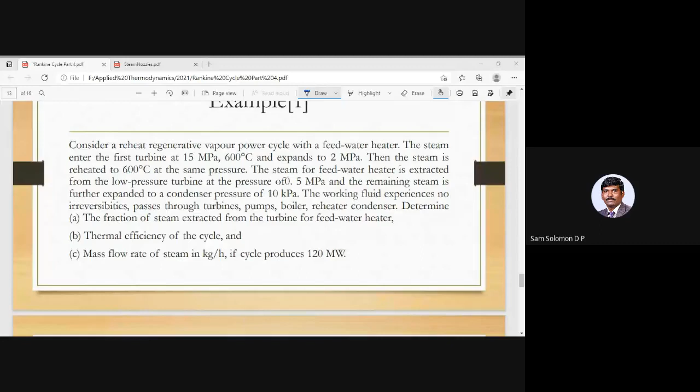So we will continue with our discussion on Rankine cycle. We will solve one problem, and with that we will close this Rankine cycle.

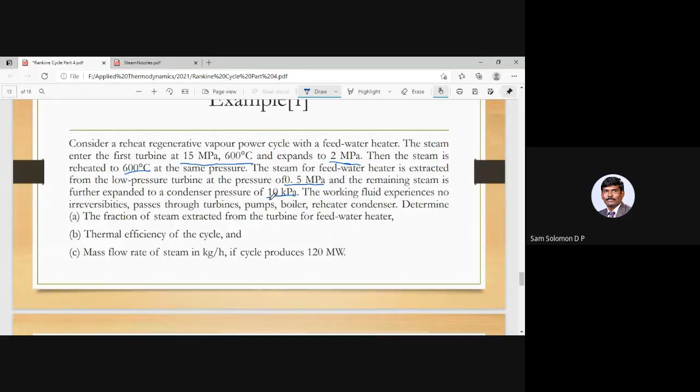The steam for feed water heater is extracted from the low pressure turbine at 0.5 megapascal. So it expands from 2 megapascal, and before it completes its expansion, at 0.5 megapascal some extraction is taking place, and the remaining steam is expanded to 10 kilopascal. So it is like 20 bar to 0.1 bar. Okay, so that is the total expansion in the low pressure turbine.

So the working fluid experiences no irreversibilities, passes through turbines, pumps, boiler, reheater, condenser. Determine the fraction of steam extracted from the turbine, thermal efficiency of the cycle, mass flow rate of the steam if the cycle produces 120 megawatt. Before solving this problem, I want you to draw the TS diagram for this. This includes reheating and regeneration, which means you will have two turbines and two pumps.

So I'll give you 2 or 3 minutes time. I want every one of you to draw the TS diagram. I will call someone randomly and ask them to show their TS diagram. Come on, draw your TS diagram quickly so that we will proceed with this problem. Because drawing the diagram is more important. If you are able to draw it correctly, then identifying the value and solving it is going to be simple. Come on, draw the TS diagram. I'll call someone.

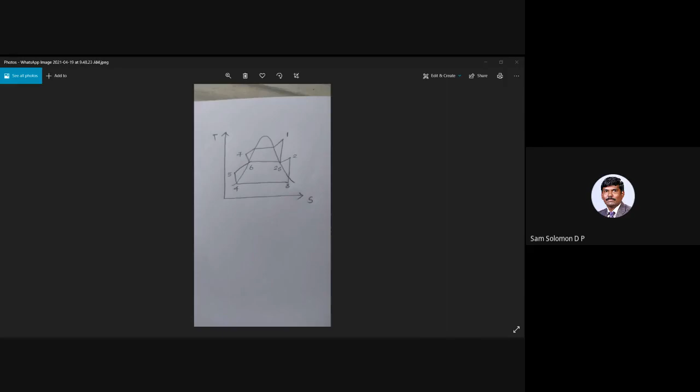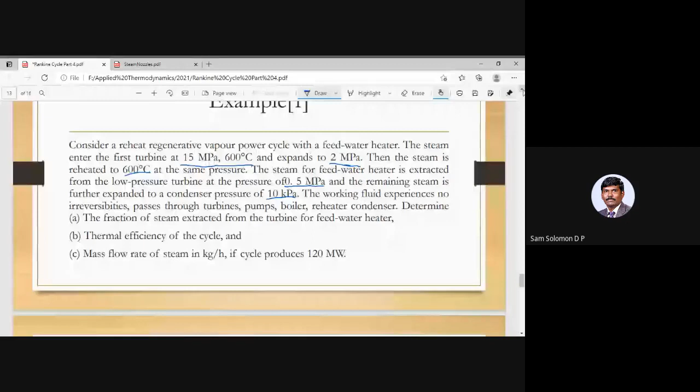Okay, okay, you can stop presenting. I'll show you. I will go to our presentation and I'll explain it. So let me say, so I have... not so straight. Let me try again.

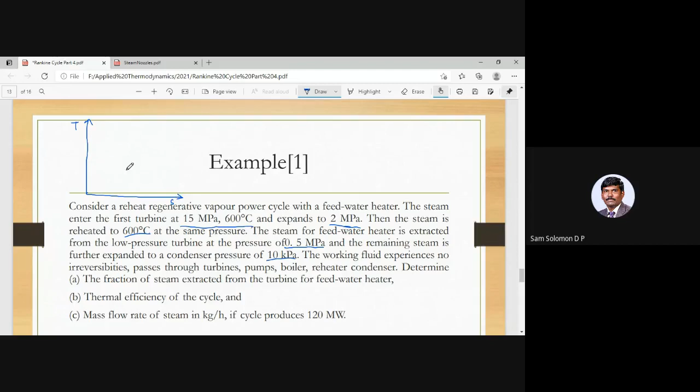So we are talking about TS diagram here. We have the saturated vapor and the liquid line. So assuming it to be in the superheated state, this is my point number one. And they are saying this pressure is 150 bar, 15 megapascal. So this boiler pressure is 150 bar and it expands to 2 megapascal, which is 20 bar. We do not know where it is. So let's assume that it is also in the superheated state.

And there is a constant pressure heating back to the same temperature, 600 degrees centigrade. So that is point number three. And then from there, it expands to 0.1 bar. But before that, some amount of steam is extracted at 5 bar. So this is your feed water heater. Okay. And after that, you have the expansion here, which is 5. Okay. And then in the condenser, this is your 6.

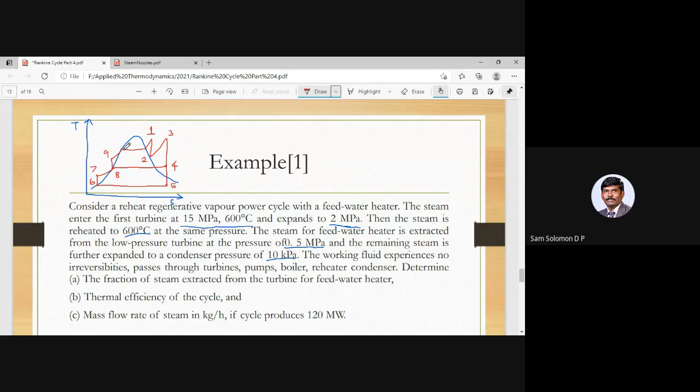Then you are pumping it to 7, and both of them join at 8. And there is another pump, 9, which is the inlet to the boiler. Okay. He has drawn one more line from 2 over here to 10, and that is not needed because this 2-3 is only reheating. Here there is no extraction from point number 2. Okay, so reheating is taking the steam back to the boiler and heating it inside a set of tube bundles. It's not the boiler exactly, but a set of tube bundles which we call some sort of a heat exchanger. Okay, so 2-3 is your reheating, 3-4, and it is at point number 4.

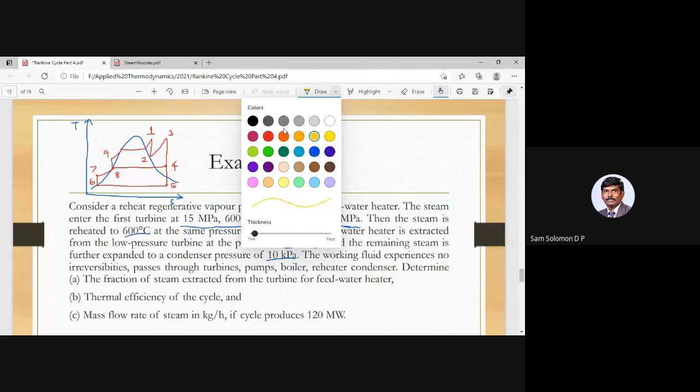Okay, so if you want, we can show that here. So here you have 1 kilogram of steam, M1 getting diverted. So from 4 to the condenser and M1 to the feed water heater. Okay, you should get the state points, and then you can use the Mollier chart. So from the Mollier chart, you can get the values of H1, H2, H3, H4, and H5. All these values you can get from the Mollier chart.

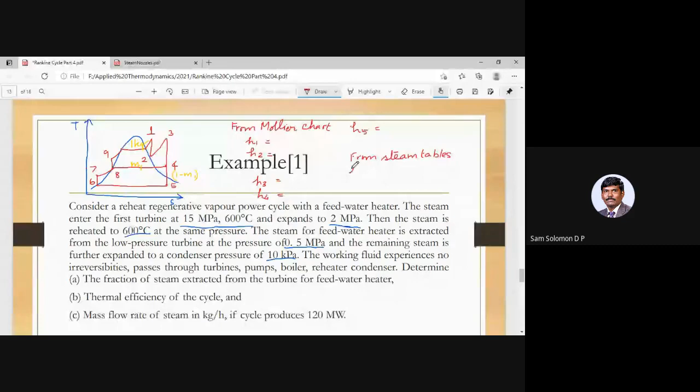Okay, and then from steam tables, you can get the value of H6, which is HF at 0.1 bar. Similarly, you can get the value of H8, which is HF at 5 bar. Okay, these values you can get. And you have to be a little bit careful here. The fraction of steam extracted from the turbine, that is the value of X4. No, not that. That is dryness fraction. What they are asking is fraction of steam extracted is M1. So you have to find out the value of M1.

Thermal efficiency of the cycle, W net divided by heat supply. And here you have to be a little bit careful once again. Your W net will include W of high pressure turbine, W HPT, plus W of low pressure turbine minus W of pump 2 minus W of pump 1. All these put together will be your W net. And your heat supply will also have two entities. One is heat supply to the boiler, the other one is the reheating. So QB plus Q reheating. Okay.

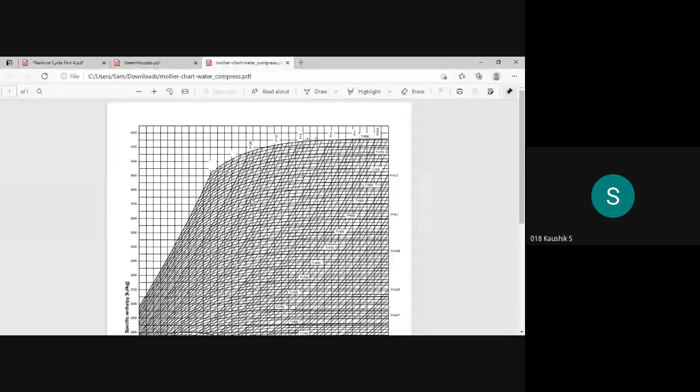Yes. Okay. So according to the problem statement, it is 15 megapascal and 600 degrees centigrade. There is no problem because our Mollier chart is also in megapascal. So here you have got 10. Just a minute. So here you have 10 megapascal and here you have got 20 megapascal. So this should be 12, 14, and in between 14 and 16, we should have another line that is your 15. So let's consider the 14 megapascal line,

and then from there we can move on to, oh, sorry. So it is 15 megapascal and 600 degrees centigrade. Okay. So this is your 10, 12, and 14. Okay, so we have to move along this line till we reach 600. So this is your 600 degree centigrade line.

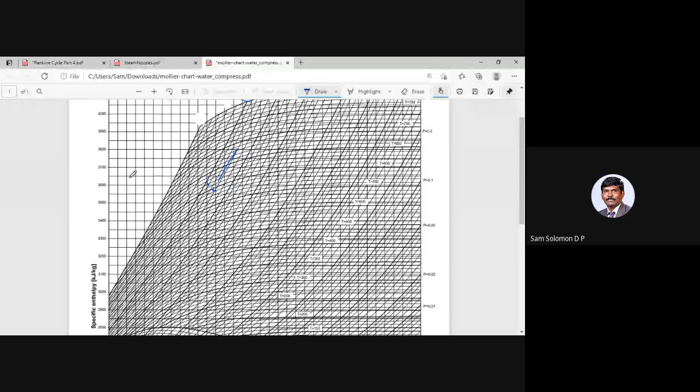Okay, so it intersects at this point for 14, and for 15 it should be somewhere over here, and that should be your point number 1. And that turns out to be 3,575. Do you agree? Okay, so for pressure P equal to 15 megapascal and 600 degrees centigrade, we get H1 as 3575. So H1 is 3575 kilojoule per kilogram.

Okay, and let's see what H2 is. So for H2, it has to be expanded to 2 megapascal. So from point number 1, we have to draw a straight line till it reaches the 2 megapascal line. So this is the 2 megapascal line. I'm not able to draw that very accurately, but that dark one over here. Okay. So I believe that you guys have taken printout of the sheet and you are drawing just like I am drawing. I hope you guys are also drawing it.

So from here, it is at this point, that is your point number 2, and that is slightly above 2950. So let's call it as 2975. So H2 is 2975. I'm not sure what the book answer is. I don't have the book by my hand and I don't have the solution also. So we shall just proceed as such.

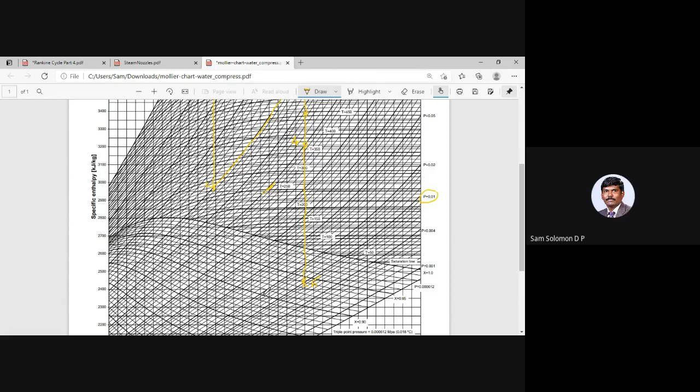So here we come. So this is your point number 5, and that is below. So between 2400 and 2450. So let's say 2425 kilojoule per kilogram. Okay, so these are the 5 different points that we mark from the Mollier chart. Okay,

so now I'll stop presenting, and I want to know if you guys are really marking this with the help of the Mollier chart. How many of you are doing this actually? You can type in the chat box if you are looking at the Mollier chart. Do you have a printout of the Mollier chart? So if yes, you type in the chat box. Do you have a printout of the Mollier chart in hand? Nanda Kumar says yes. Who else? Vimal says yes. And the rest of the class, they don't have.

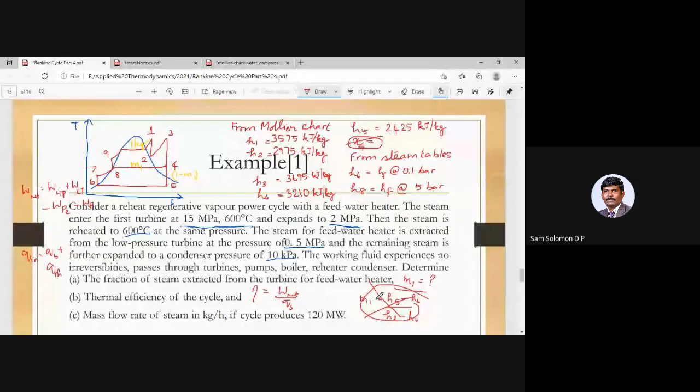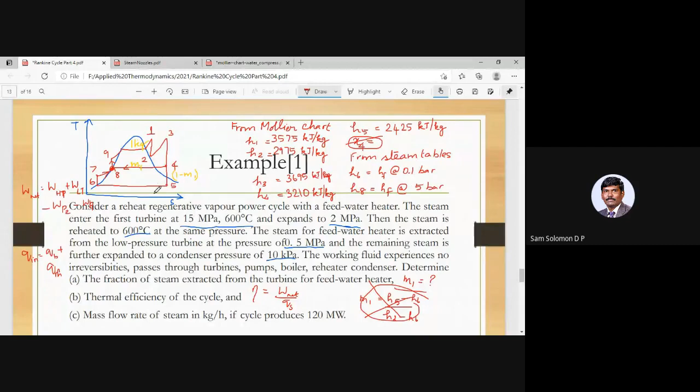So unless you understand this concept, if you just memorize this formula, now you will be in trouble because the state points are entirely different because the definition of the problem has changed. Okay. So now if you want to estimate M1, you have to write energy balance for the state point 8. So who is entering 8? So you have one entry from 4 and another entry from 7, and there is an exit from 8. Okay, so you have to take this into consideration for solving your M1. So let us write the energy balance for this.

So you have M1 times H4 plus (1 minus M1) times H7, and both of them join together and give back H8 times 1 kilogram. Anything multiplied by 1 is just that term, so that is H8 simply. So you will have M1H4 plus H7 minus M1H7 equal to H8. Okay, and so M1 times (H4 minus H7) equal to H8 minus H7. So M1 is H8 minus H7 divided by H4 minus H7.

So this is the amount of steam that is extracted from the turbine before it goes into condensation, or this is the amount of steam that is extracted so that it goes into the feed water heater. Okay, so you can get the value of H8 by looking at HF at 5 bar. The H4 value is already known from the Mollier chart, and what we don't know is H7.

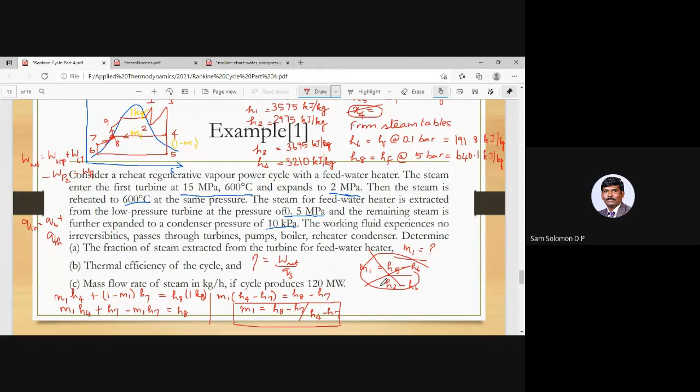Before proceeding further, since the layout is also important, let's see what sort of layout we will get for this particular problem. You have a boiler, and let me show it like this because we will have a reheater as well. So you have a boiler, and from the boiler we have the high pressure turbine. So this is your state point number 1.

This is your state point number 2. And it is taken back to the reheater, and then there should be a low pressure turbine. So the entry here is 3.

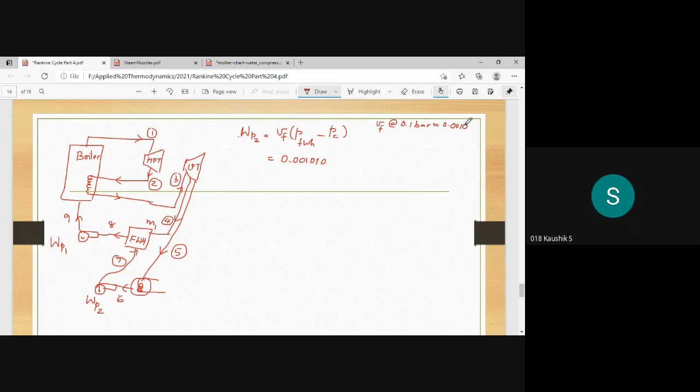So your WP2 is VF times, so this pump is operating between the feed water heater, so P of feed water heater minus the pressure of the condenser. This VF is at condenser pressure, and I believe this value was 0.001010, Kaushik can check this. So this VF is at 0.1 bar, which is 0.00101 meter cube per kilogram.

And this feed water heater pressure is 5 bar minus 0.1 bar. Don't forget to multiply by 10 to the power 5, and you will get some answer over here. What is that you get? So it is 5 minus 0.1 multiplied by 10 to the power 5 times 0.00101. That gives 494.9, yeah, but that is in joule per kilogram.

So we can write this as 0.4949, right? So let's say 495. So this is 495 kilojoule... actually 0.495 kilojoule per kilogram. And this WP2 is between H7 and H6. So you already know the value of H6, which is 191.8, and WP2 is 0.495.

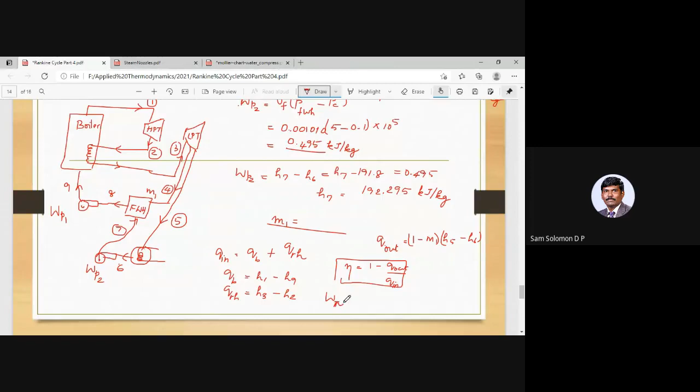And one more thing is the mass flow rate of steam. That's very simple. Mass flow rate of steam, what they have given is W net. W net is, they have said, 120 megawatts. You can simply find out W net as Q in minus Q out, and you will get some answer in kilojoule per kilogram.

You can convert this also into kilowatt, into 10 to the power 3 kilowatt. And if you want to find out the mass flow rate of steam for the entire power plant, it is W net. You can call this as W dot net because it is in kilojoule per second.

Okay, it should be the other way around: W dot net divided by W net. Kilojoule per second divided by kilojoule per kilogram, that will give you kilogram per second. I think you can do this on your own.

In the Rankine cycle, the general layout is that you have a boiler, turbine, condenser, and pump. We have also seen the condition for irreversibility, where sometimes your turbine and pump have isentropic efficiencies, where the process is not purely isentropic. Then we saw the modifications: reheating, regeneration, and the combination of both reheating and regeneration.

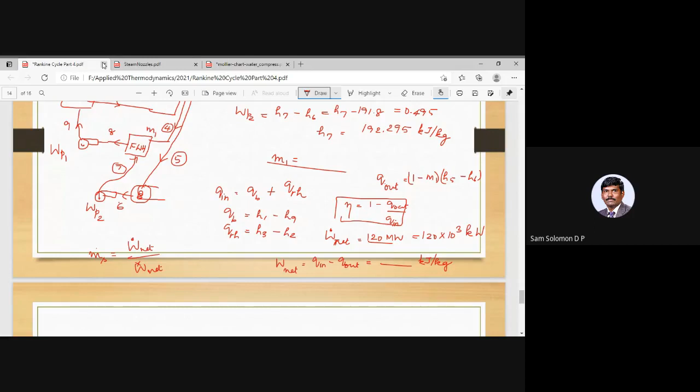So please concentrate on it and make sure you guys are thorough with this.

The next part of this unit is steam nozzles. We have already covered a little of this in our basic engineering thermodynamics course. Nozzles are used to increase velocity, and there are different types of nozzles: convergent, divergent, and converging-diverging nozzles, which we will see when to use a little later.

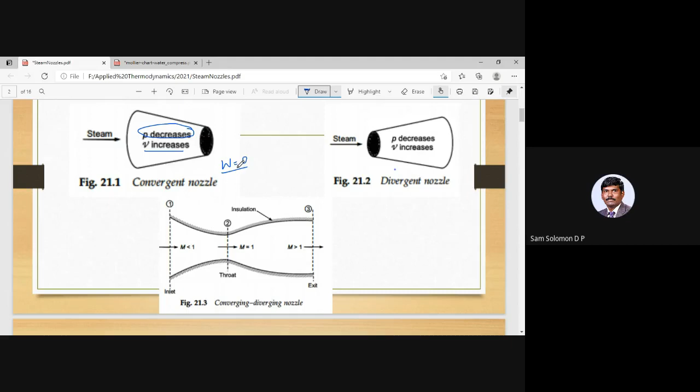In all three nozzles, velocity increases at the cost of pressure, which means pressure energy is getting converted into kinetic energy. That is what happens in a nozzle. There is no work being done in a nozzle; work done is zero. And in most cases, we assume the nozzle is adiabatic, which means heat transfer is also zero.

The inlet to the nozzle and the exit of the nozzle are almost at the same height from the ground, so the change in potential energy is also zero. Your pressure decreases and your velocity increases. The objective of the nozzle is to increase the velocity of the fluid flow that happens inside it. If there is a decrease in area, the entry area is more than the area at the exit.

Such a type of nozzle is called a convergent nozzle. Here you can see there is an increase in area; that is called the divergent nozzle. You can see the area diverging, so it is called the divergent nozzle.

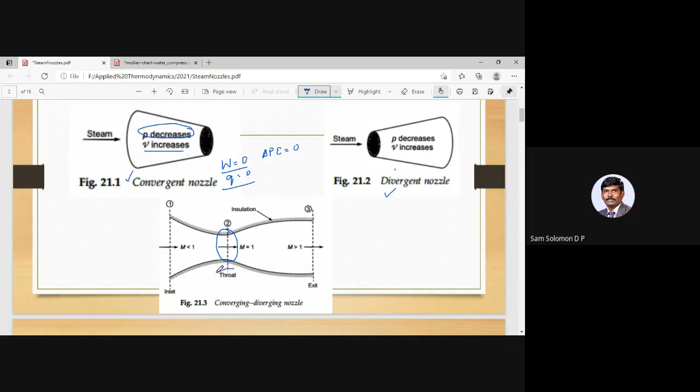And here you have both: there is a convergence, a continuous decrease in area, and at this region the area is minimum, which we call the throat. Thereafter there is an increasing area, which is the divergent portion.

Previously we used to have a subject called gas dynamics where we talk about Mach number. Mach number equal to 1 is defined as velocity of fluid flow divided by velocity of sound. When this is equal to 1, the velocity of flow is equal to the velocity of sound. Since the area is minimum in the throat, you will have maximum velocity in this region.

The area is minimum and the velocity is maximum, so the pressure should be much lesser. There will be more pressure drop here, and this region is called M equal to 1, which we call sonic condition. Don't worry about this, it's not the important thing. When the flow is in the region M less than 1, we call it subsonic condition, and when M is greater than 1, we call it supersonic condition.

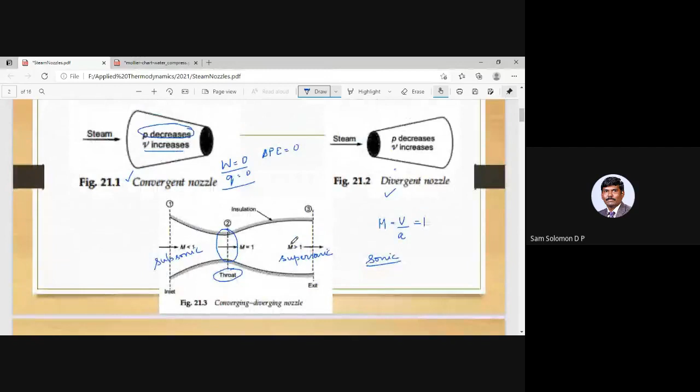This we usually used to do in gas dynamics, which was part of the regular course. But in this particular regulation, it has been shifted to the elective, so you won't have this course on gas dynamics. So this is an introduction to nozzles. When to use convergent nozzle, when to use divergent nozzle, we will see later on.

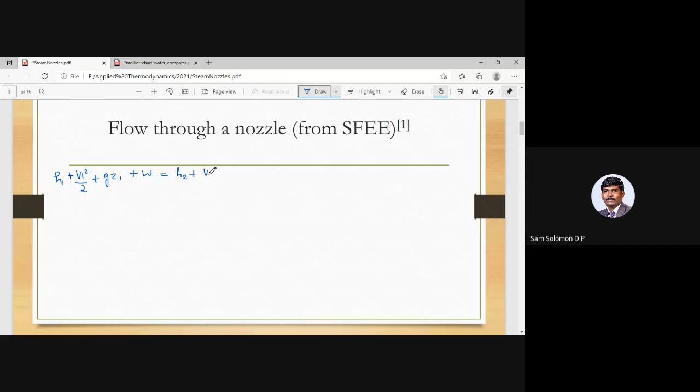Flow through a nozzle, from the steady flow energy equation: if you remember, we used to write H1 plus V1 squared by 2 plus G into Z1 plus W equals H2 plus V2 squared by 2 plus G into Z2 plus the heat Q. If you want, with dot notation, everywhere should be multiplied accordingly, or simply Q.

And as we just saw, there is no work done, heat supplied is zero, and the change in potential energy G into Z2 minus Z1, or Z1 minus Z2, is also zero. So you can eliminate all these terms.

What is left out is H1 plus V1 squared by 2 equals H2 plus V2 squared by 2. This we have already done in engineering thermodynamics. We said the velocity at the exit is greater than the velocity at the inlet, which means the square of the velocity will be much greater than the inlet squared velocity. So if that is the criteria, you can neglect this V1 squared by 2.

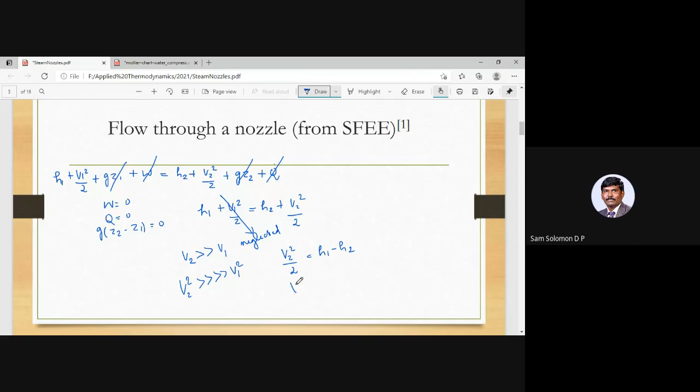It can be neglected. It's not that it doesn't have any value, this value is very small compared to V2 squared by 2. So V2 squared by 2 equals H1 minus H2, or V2 squared is 2 times H1 minus H2, or I can say V2 is root of 2 times H1 minus H2.

Usually the enthalpy is represented in kilojoule per kilogram, so sometimes they simply multiply it by 1000, so that this delta H, H1 minus H2 or H2 minus H1, whatever, this value, root of 2000, I think this is 44.72. You can check that, root of H1 minus H2. Is this 44.72? One of you can check.

Root of 2000. Okay, let's do that, we have a calculator here. So 2000 to the power 0.5. Yes sir, 44.72. Okay.

So that equation is also sometimes used in the formula directly, to convert kilojoule per kilogram to joule per kilogram, and now the velocity V2 is in meter per second. This we have already done in engineering thermodynamics, this is just a recap of what we have done already.

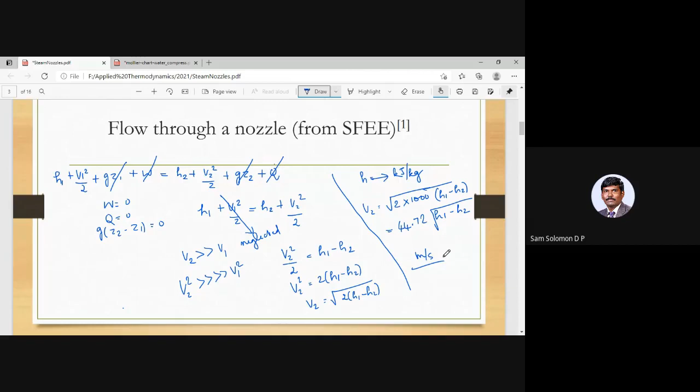And discharge through an isentropic nozzle - this concept you have to understand a little bit. When you say isentropic nozzle, the expansion inside the nozzle - why do I use the word expansion? There is a pressure drop. It is that pressure drop, or decrease in pressure, that is getting converted into increase in kinetic energy. So whenever there is a drop in pressure, when the pressure falls, we call it an expansion process.

So the expansion in the nozzle is isentropic, that is what we assume ideally. Why do I say ideally? The definition of isentropic is reversible adiabatic. None of the processes in nature are reversible - that should always be in your mind. So the moment I say isentropic, I am talking about a reversible process which is not going to happen in nature. That is an ideal scenario, which should always be in your mind.

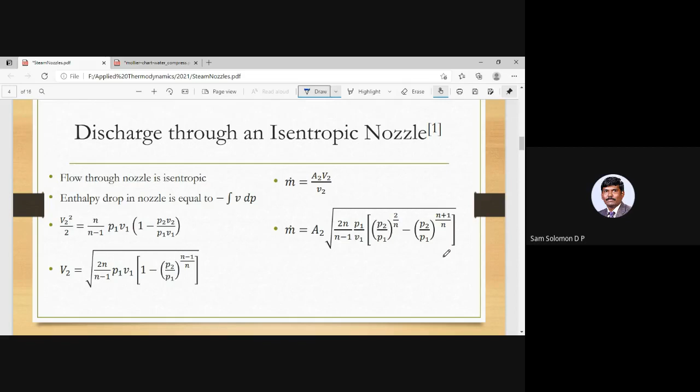In the previous slide, I showed you your V2, your exit velocity, is a function of enthalpy drop, H1 minus H2. The entry to the nozzle is at higher enthalpy, higher pressure. You know H is U plus PV, right? So this P is going to be higher and this U is going to be higher, and that makes H higher. When you say H1 minus H2, it is at the cost of the pressure energy, so your pressure is going to fall. So I can say V2 is a function of enthalpy drop, and that enthalpy drop in the nozzle is equal to minus integral VdP.

If you look at a closed system, we used to call W as integral PdV. For a recap, if you remember, if we have a cylinder piston arrangement, your piston can move up and down, so there is a change in volume - your volume is not fixed, only the mass is fixed. Mass is constant, that happens in your closed system, and we call it W equal to integral PdV.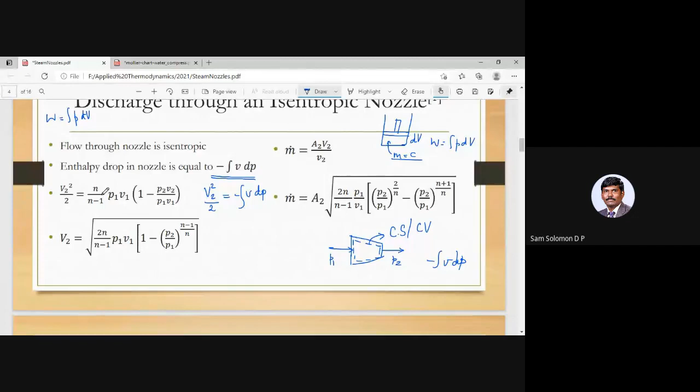And we have assumed that the process is isentropic. They call it isentropic, but they have taken n as a common term, where if your n is equal to gamma, that makes it isentropic. So you need not confuse this. As a generalization, this is n. But if you're taking it as isentropic, you can always replace n with gamma. We have already done this, but because the term is slightly different, we can do that again. So we have minus VdP.

We have assumed the process to be isentropic, which means P1 V1 power gamma equal to P2 V2 power gamma equal to PV power gamma. So now what we require is something for V. Let me say PV power gamma equal to P1 V1 power gamma. So your V power gamma would be P1 V1 power gamma divided by P, and my V would be P1 V1 power gamma divided by P whole to the power 1 by gamma.

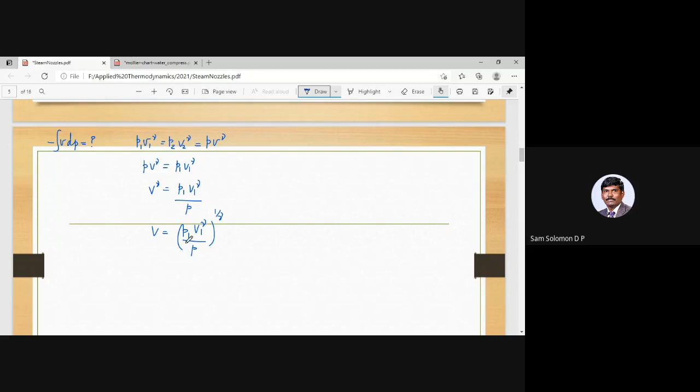And this V can be substituted inside the integral sign. So integral VdP, I'm just neglecting the minus over here; let's take that at the end. So that could be P1 V1 power gamma whole to the power 1 by gamma divided by P to the power 1 by gamma into dP. And this term can be taken as constant outside, because P1 V1 power gamma is constant, whole to the power 1 by gamma, integral of dP by P to the power 1 by gamma.

To make things simple for calculation, we can say this is P to the power minus 1 by gamma times dP. The integral is between the limits 1 and 2, so keep that in mind. So you have P1 V1 power gamma whole to the power 1 by gamma, and when you integrate, you will have P to the power minus 1 by gamma plus 1 divided by minus 1 by gamma plus 1, between the limits P1 and P2.

So you will have P1 V1 power gamma whole to the power 1 by gamma. 1 minus 1 by gamma is gamma minus 1 by gamma, and in the denominator also you have gamma minus 1 by gamma, between the limits P1 and P2. So I can take gamma by gamma minus 1 outside, and have P1 V1 power gamma whole power 1 by gamma, and inside the brackets P2 to the power gamma minus 1 by gamma minus P1 to the power gamma minus 1 by gamma. Up to this, is this clear?

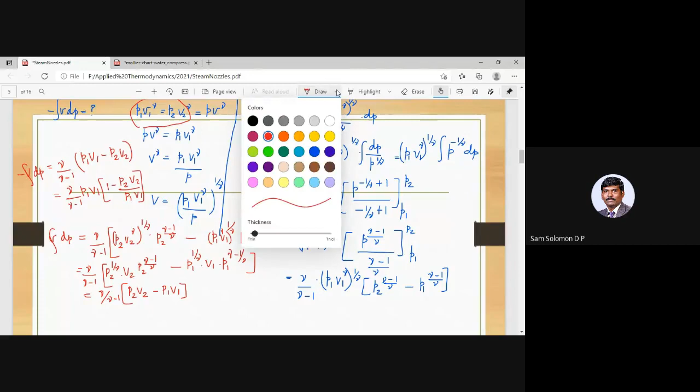I'm not sure if we will be able to continue this over here. I didn't leave a page for that, so that's a problem. What shall we do? It's not working here.

So we said, so we were able to... So what we got here was minus integral VdP. This is equal to gamma by gamma minus 1 times P1 V1.

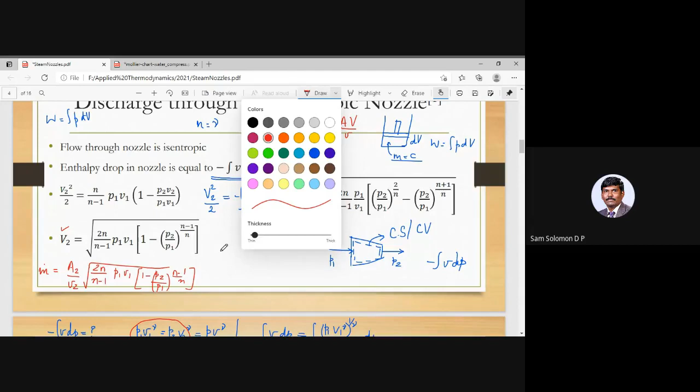Okay, so A2 V2 by small v2, and this small v2 has to be once again taken inside. So how do we do that? So we have m dot. Are you able to see this whiteboard now? Yes. M dot is A2 capital V2 by small v2. So we don't disturb this A2 by v2. We simply substitute 2 gamma by gamma minus 1 P1 V1 times 1 minus P2 by P1 whole to the power gamma minus 1 by gamma.

Okay, and if I want to take this inside the roots, you have A2... oh, it has erased everything. Oh my god. Can we undo this? Yes, we can. I should have used this eraser.

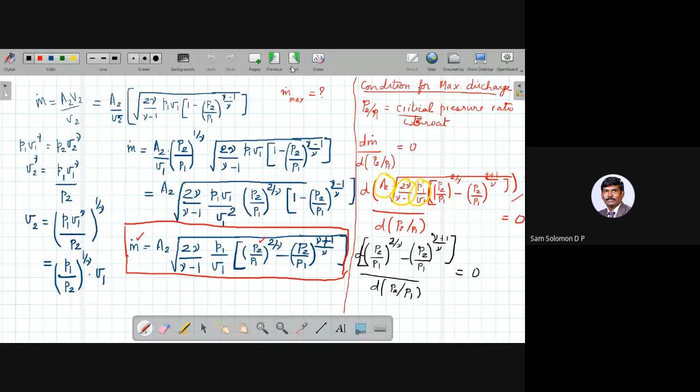Okay, so we had an expression for m dot. If we go to the previous page, this was your expression. So m dot is A2 times 2 gamma by gamma minus 1. Is it P1 by V1? We will just check it. Yes, P1 by V1.

This is P2 by P1 whole to the power 2 by gamma minus P2 by P1 whole to the power gamma plus 1 by gamma. This was the expression that we had before, and now you can substitute the value of P2 by P1 in this particular equation and you can get the value of m dot max.

So your m dot max is a2 times. So no change in the first two expressions, 2 gamma by gamma minus 1, and you have p1 by v1. No change here. And now p2 by p1, this fellow is going to be gamma plus 1 by 2 whole to the power gamma by 1 minus gamma, and there is already a 2 by gamma outside. Okay, minus gamma plus 1 by 2 whole to the power.

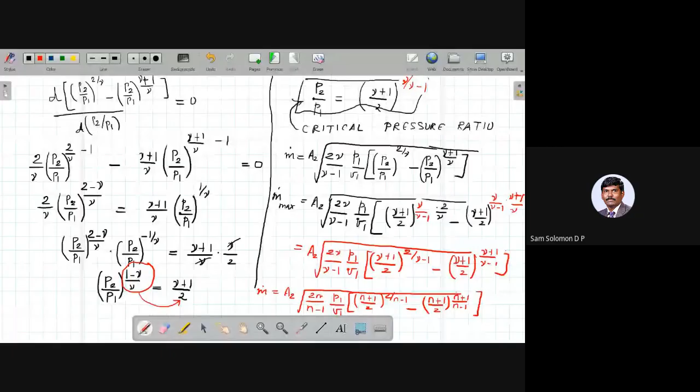So similarly, we will look at one, and that will be the end for today's class.

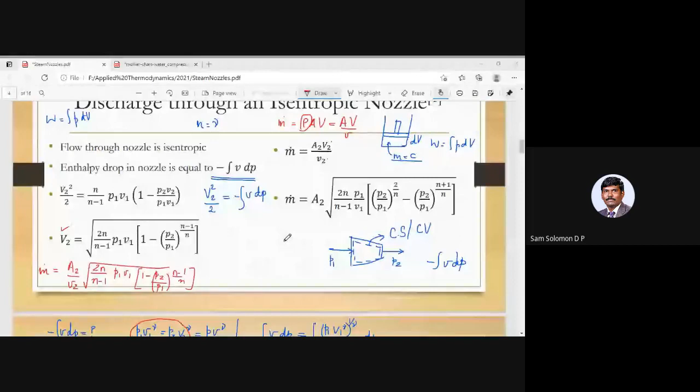So this is what we saw as discharge through an isentropic nozzle. And we have seen the condition for maximum discharge, and we derived this. Here we said 2 by gamma plus 1 to the power gamma by gamma minus 1. Since we started with gamma, we just proceeded with that. As a general expression, you will have it in terms of n. You can further simplify that and you will end up getting this term.

So you can couple these two expressions, n plus 1 by 2, and in the powers you also have the common denominator n minus 1. So you will have

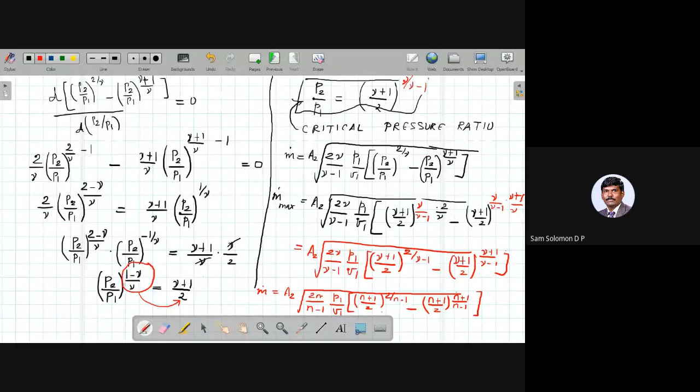this expression is entirely different from this expression. I think we have made some mistake over here, which we won't be able to fix today, so we have to do it tomorrow. We ended up getting n plus 1 by 2, but the presentation says 2 by n plus 1. So we have made some error somewhere. We will check it and start the condition for maximum discharge once again tomorrow.